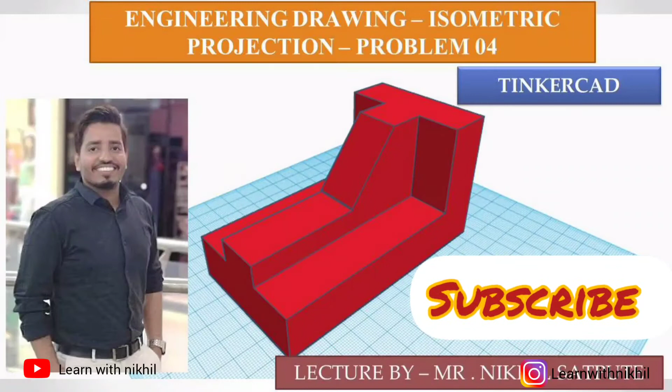So here we have taken another sum of isometric and will draw it using Tinkercad software. This is the solution which we have drawn in isometric. This is the question, front view and the top view. The dimensions are given. The width is 110.

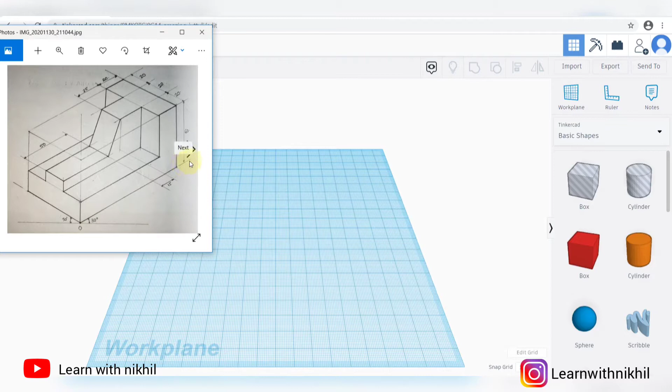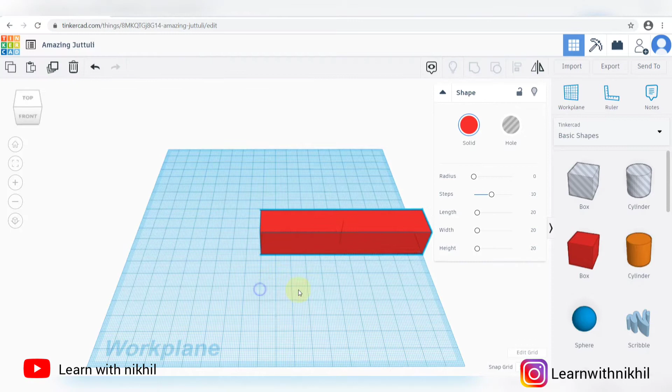The height is 60. So according to the given dimensions, we'll draw it and construct in Tinkercad software. First we'll take a box as per the dimensions: 110 width, we have calculated, 60 depth, and height is 60. So we have constructed a rectangular box first.

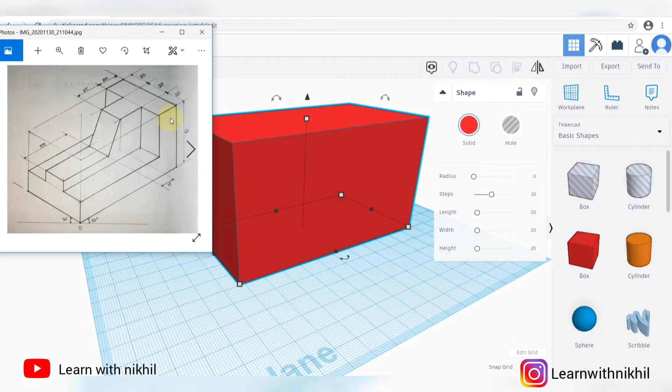As in isometric manual drawing also we do this first. Now we have to cut this part on the left hand side and on the right hand side. Dimensions we will calculate. The height is 20.

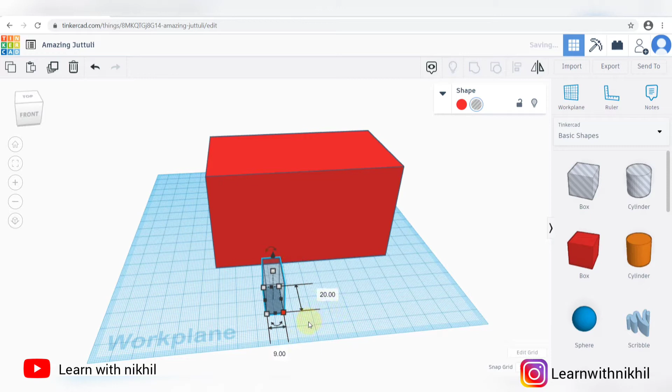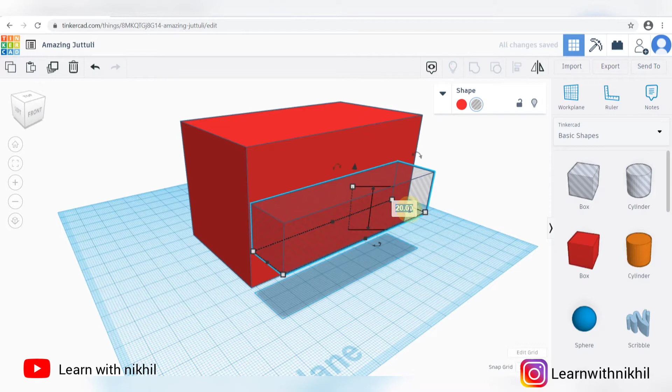So first we'll take a box with the shape of a hole. Adjust its dimensions, that is 110 minus 20 is 90. So the depth height we will increase it at 20 as the cut is above 20, and this height we can increase anyhow as we want to just slice it up, so the height doesn't matter.

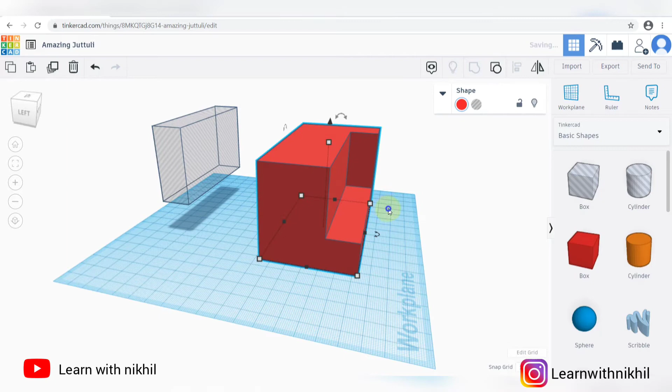We'll duplicate it as we want to cut it on the other side as well. Now grouping this two and aligning forward and on the extreme right, we'll group it, select and group. So this part has been cut. Same we will do it with the other side as well.

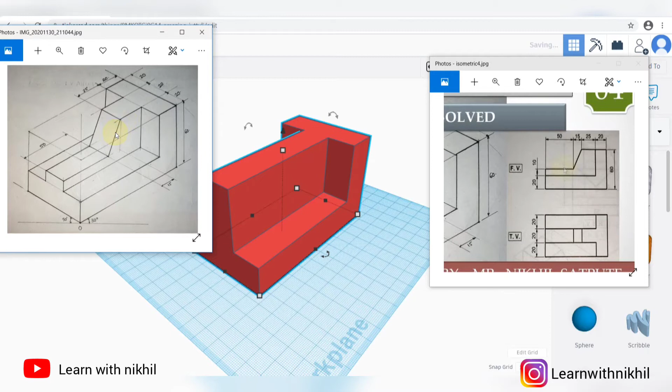After this, we need to slice some more parts. There is a slant part. We'll do that later. First we will cut the center part.

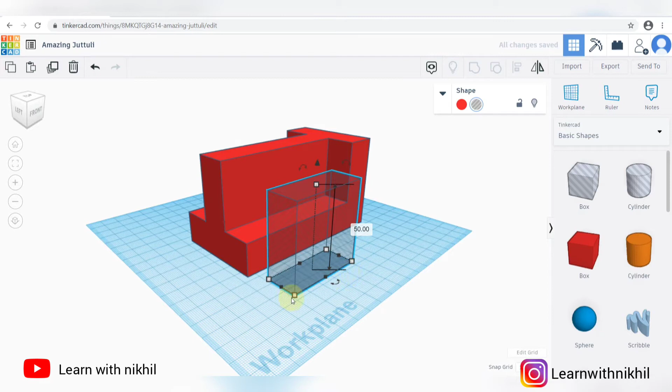Take a box with the shape of a hole. Adjust it. The width is 15, it is given. Height will be 50, you can increase as much as you want. We'll move it up at a height of 20.

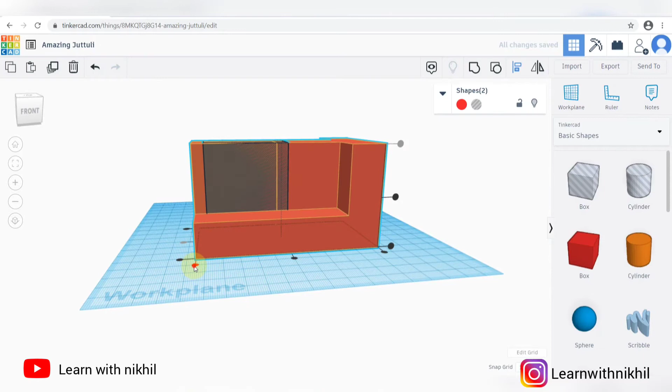Now we'll just center align it, front align, top align, front align. But as you know, we want the cut part to be above 10 more, as it is given in the question. So we'll increase it total at a height of 30 and then slice it up. So we got this part. You can see, this is above 10.

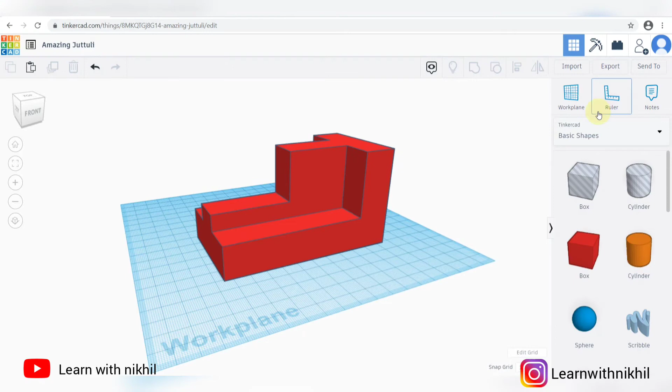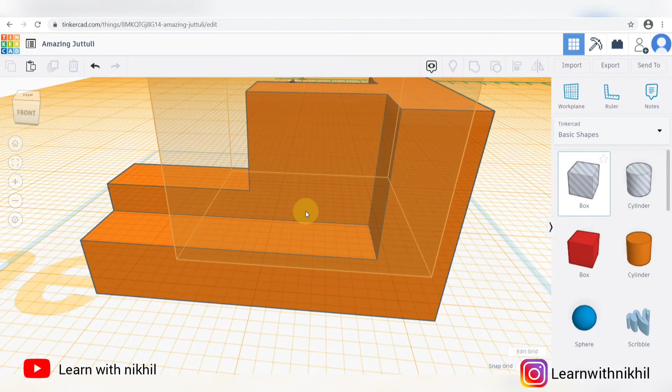Now we want to cut the slant part. You can do it as you want. What I am doing, I'll take a scale. First I'll keep a work plane on top of this. As we want the exact dimensions, we'll keep a ruler here. We'll adjust it accordingly. The length we want from this side is 22. I'll get a box shape, hole shape, and we'll rotate it and then slice the part.

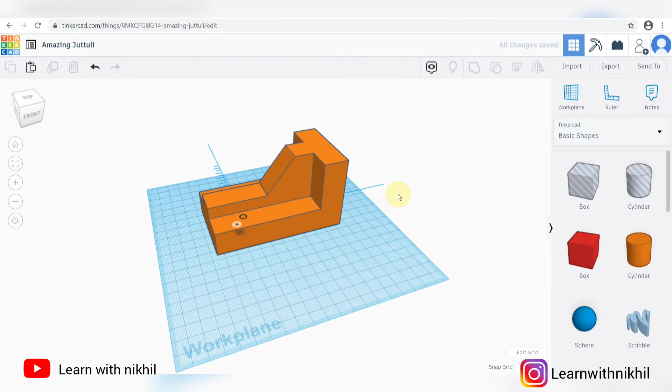Group it and we are done. Three-dimensional block is ready. You can just compare with the solution we have drawn manually.

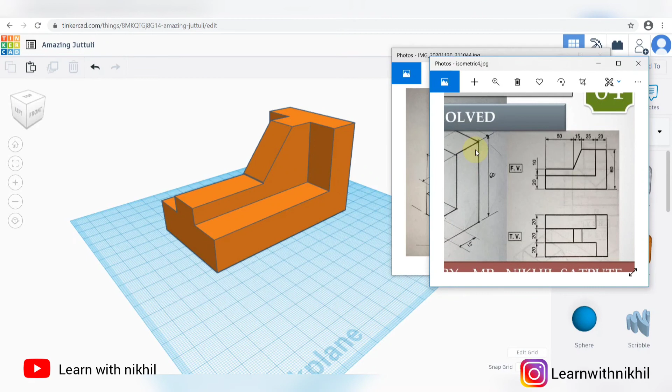So this is the solution. This is the question. I will convert this into orthographic view. This is the front view. You can see from the question the front view. We have drawn exactly the dent lines, the dark lines you can see.

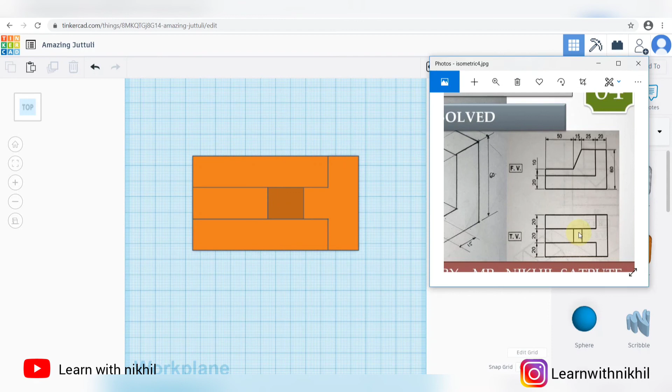Rotating it to the top view, the slant line looks like straight from the top view. You can see these two lines. This is the slant view. You can just compare with the front and the top view. Rotating back into 3-dimensional view. This is the solution we have drawn.